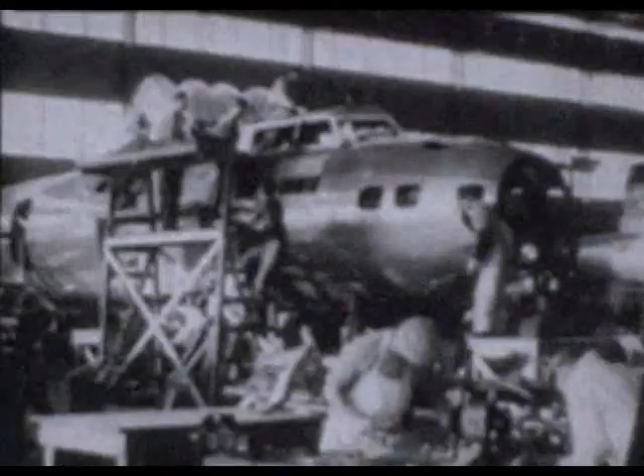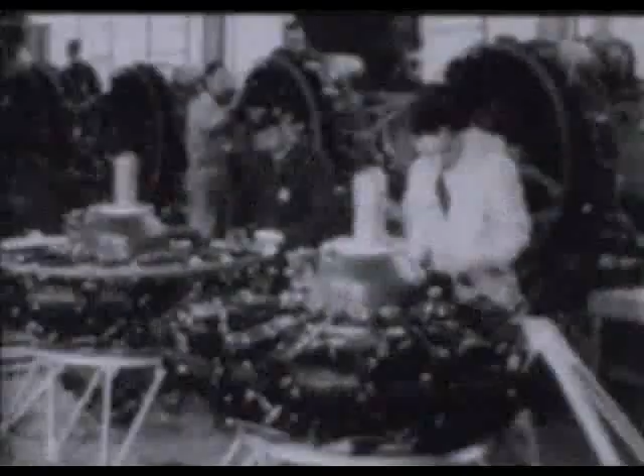Marching men and weapons to the battlefront. Backed up by an aroused American nation, our air power grows mightier by the hour. With speed, born of long experience and inventive genius, raw materials dug from the earth become swift flying wings overnight. Millions of precision parts made of steel, aluminum, and other vital metals become giant engines ready to fly.

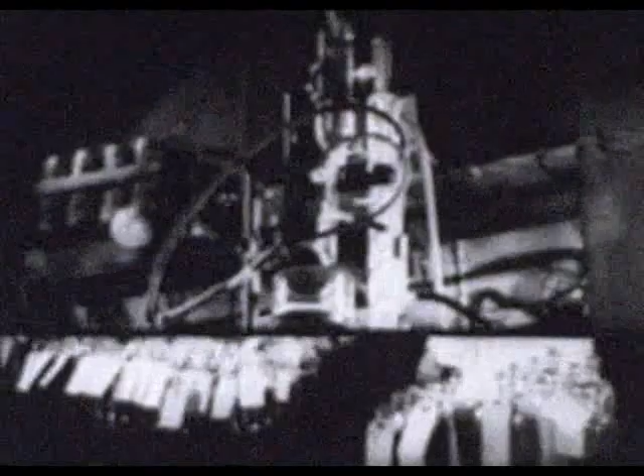Black crude oil raised from deep in the earth is transformed by the magic of chemistry into high-octane fuels to give these engines surging life, power, and speed. The petroleum industry is proud of its part in this mighty battle of the skyways, for from its long years of research have come the improvements in aviation gasoline which fly our planes.

From new refining units, skyscrapers of steel rising swiftly all over the land, comes a vast and ever-increasing flow of high-octane aviation gasoline. Great tanker fleets move endlessly across the seven seas to give the United Nations air supremacy in every corner of the globe. Yes, oil is ammunition, for without it, these mighty wings cannot fly.

But oil does not fly by itself. It takes men to use this ammunition, men who know how to use it. And while our boys make the best pilots in the world, learning to use it is no easy job. It means hard work, drill, and study. Such power cannot be handled overnight. It must be mastered step by step, as all you men well know.

Remember the very first time you climbed into the cockpit of a training plane? That was your introduction to this new kind of power. Yes, of course, there were only a few horses in the nose of that first plane, but it seemed like a million, and you got a bang out of feeling that power respond when you revved her up. But bigger still was that great moment, that day when your instructor climbed out of that plane and said, "Okay, kid, take her away. She's all yours."

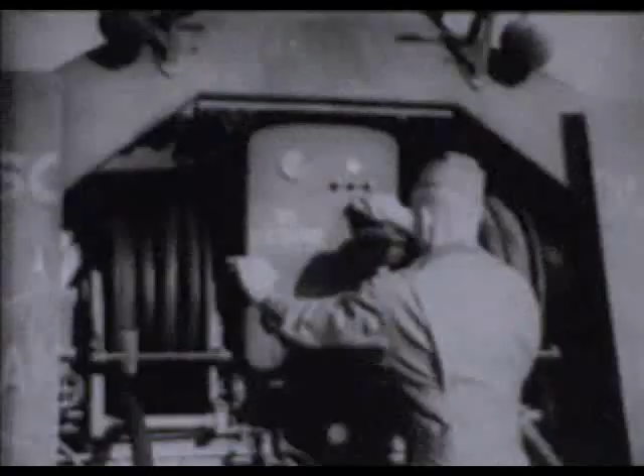Yes, you probably felt you were handling a lot of power even in that first trainer, and you wondered what it was going to be like to fly something really hot later on. That wasn't all you wanted to know about power either. For instance, why did they fuel your primary trainer with gasoline from a truck marked 73 octane, while over there a truck marked 91 octane was filling the tanks of a more powerful, advanced trainer?

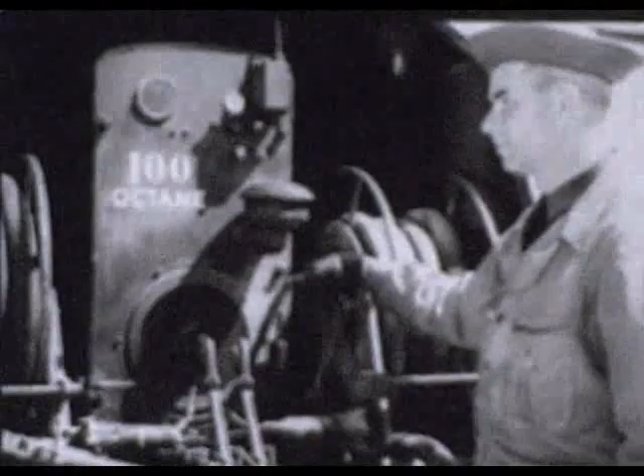Why couldn't they use the same fuel in combat? Why do they have to be so careful to fill a fighter's tanks with 100-octane gasoline? What would happen if those fellows made a mistake and put this 100-octane gas into the tanks of a small trainer that called for 73? Or what would happen if you tried to use 73 octane in the engines of a Flying Fortress?

That strange word, octane. What does it mean? Something to do with power, obviously, but exactly what? These questions are important. Knowing the answers may someday save your life or your plane. Maybe you've never realized it, but the gasoline we handle so casually every day is one of the most powerful substances known to man, far more powerful than the most destructive explosives.

For comparison, we all know that dynamite has terrific energy. Far more powerful than dynamite is TNT, the king of war explosives, used in all our shells and bombs. Yet gasoline, the gasoline that carries those bombs to their target, has, pound for pound, three times the energy of TNT, ten times the energy of dynamite.

And if this tremendous power in gasoline is not kept under control, it can be just as destructive as dynamite. Even a little of that energy, running wild, can ruin an engine as efficiently as an enemy shell, and almost as quickly. To understand why, we must know what happens to gasoline inside an engine. Let's begin with a simple demonstration of gasoline combustion.

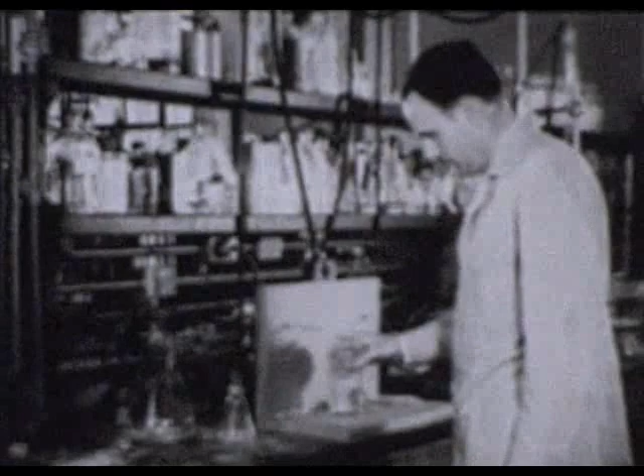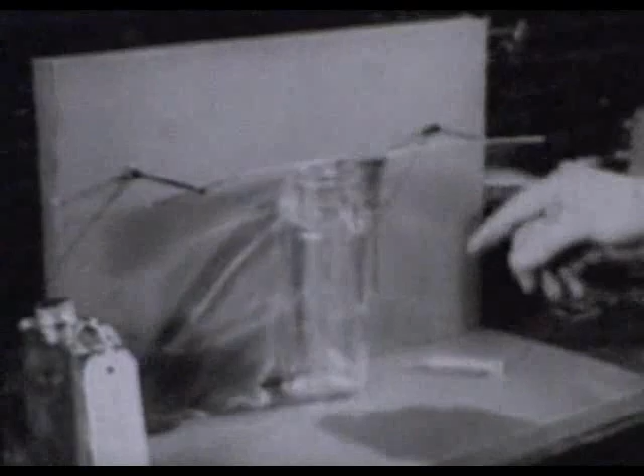Here we have an ordinary glass bottle. To close the bottle, we have a cork which fits tightly into the neck. Through this cork extend two wires connected to a spark coil so that a spark may be fired between the ends.

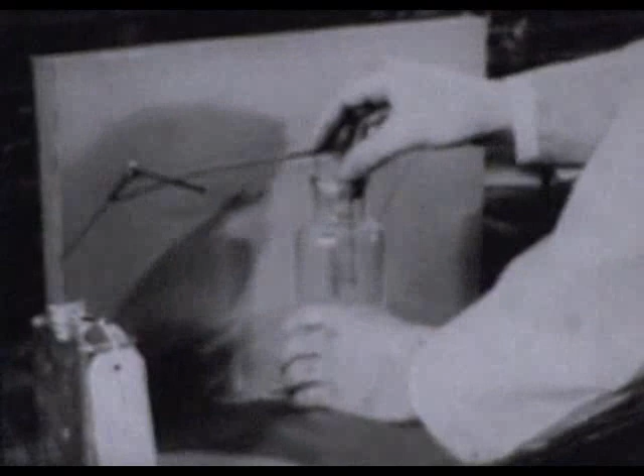To make our demonstration, we'll take a few drops of ordinary gasoline and squirt them into the bottle. Then with the cork, we'll close the bottle tightly. The gasoline, vaporizing and mixing with the air in the bottle, forms a highly combustible mixture. Watch closely what happens when a spark ignites this mixture of gasoline and air.

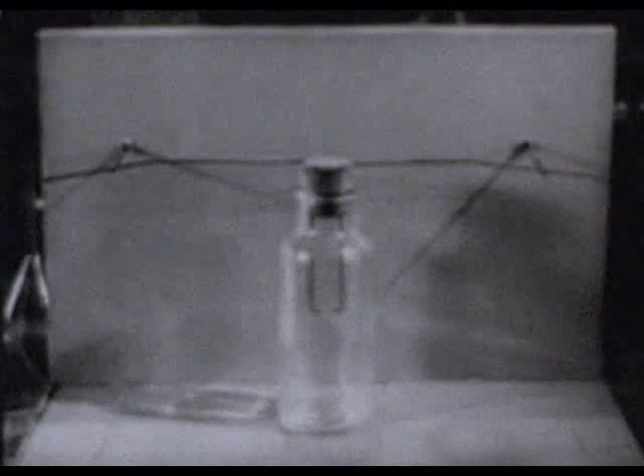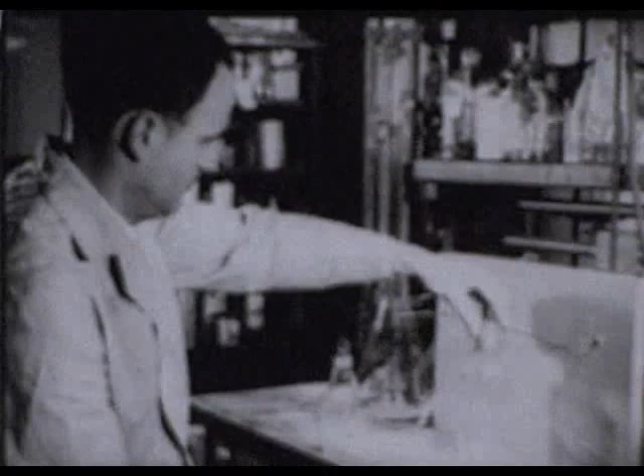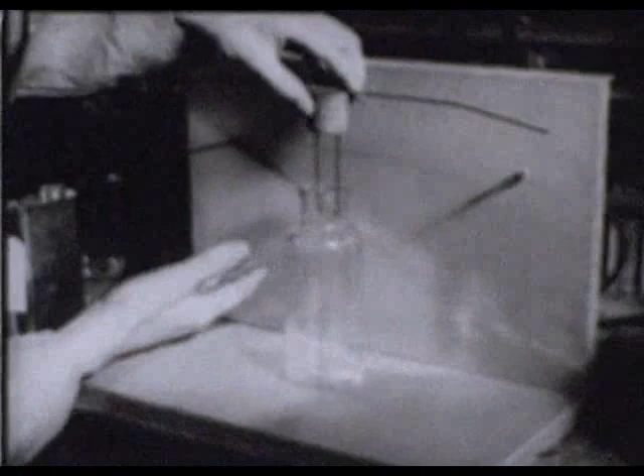This illustrates very simply the basic principle of gasoline combustion. The burning mixture converted the gasoline's energy into heat. That heat, expanding the gases in the bottle, created pressure. And the pressure blew the cork out of the bottle, changing the heat energy into mechanical energy.

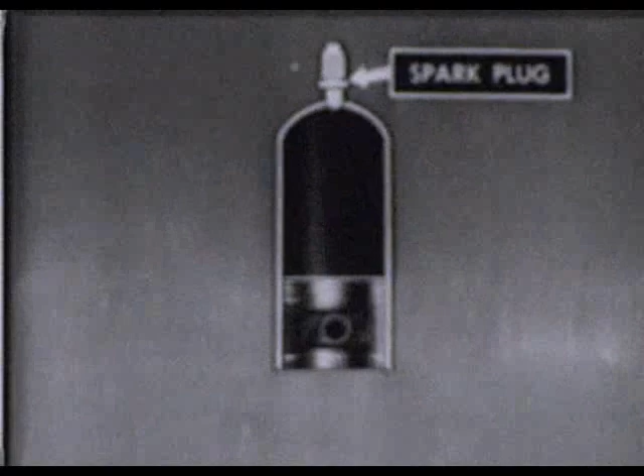Now if we take this same glass bottle, turn it upside down, make it of steel instead of glass, expand the mouth to make a straight-walled cylinder, enlarge the cork into a close-fitting piston, put in a spark plug instead of wires, add manifolds and valves to admit fresh mixture and release the burned gases, then attach our piston to a central crankshaft, we have made our bottle into one cylinder of a typical aviation engine.

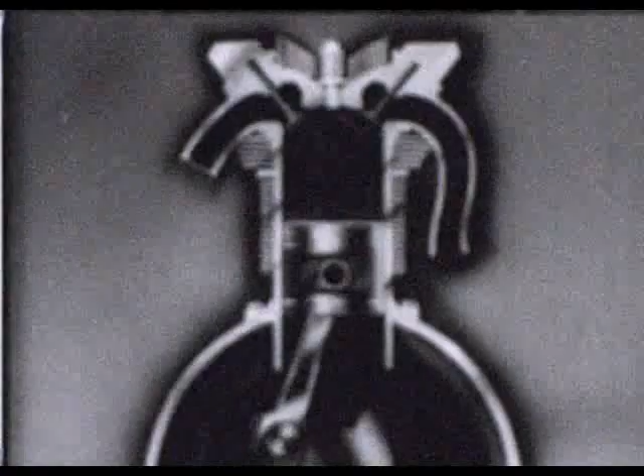This fundamental principle is the same whether it's applied to the smallest type of four-cylinder engine of a training plane or to the big engines that power a giant cargo carrier. But why is it that gasoline develops so much more power in one of these engines than it does in the other? Size alone is not the answer.

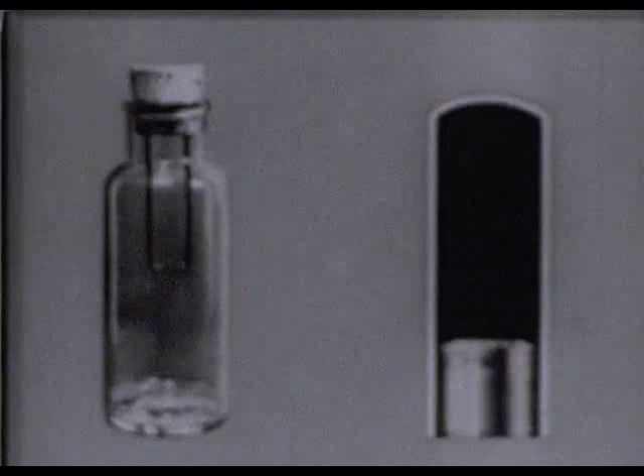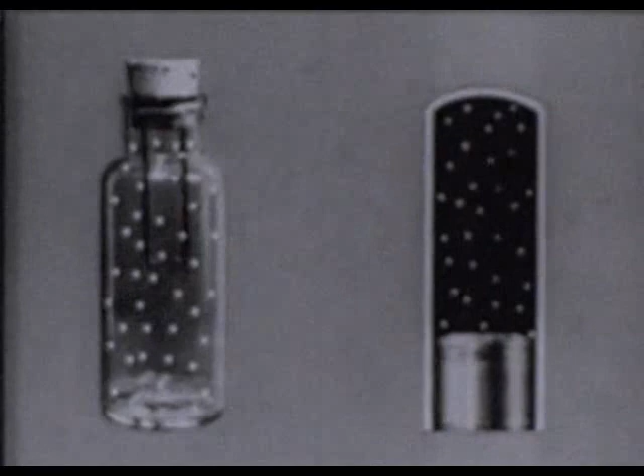Going back again to our bottle and cylinder, notice that there's a very important difference between the mixture we burned in our bottle and the mixture burned in the combustion chamber of an engine. The mixture in the bottle was under atmospheric pressure, the same pressure as the air outside. In burning, it develops very little power. But the mixture drawn into the cylinder is tightly squeezed by the piston to a small part of its original volume. This compression will produce far greater power from exactly the same amount of mixture.

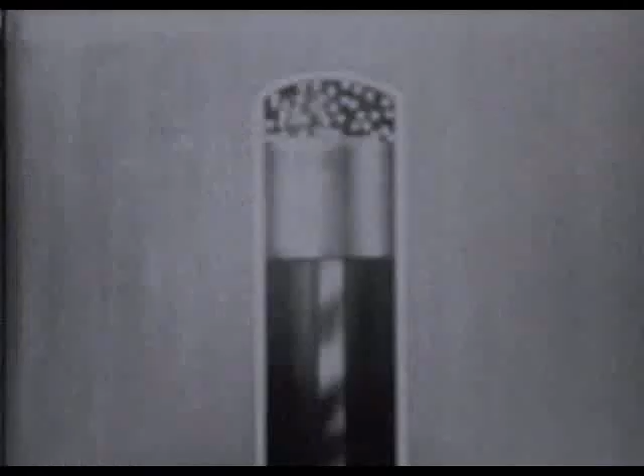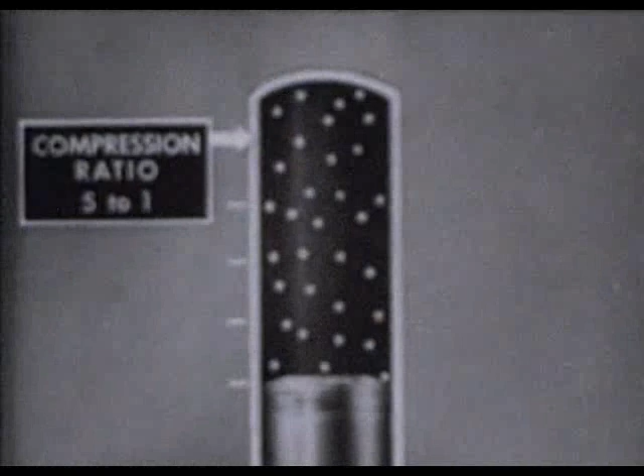The measure of how much the mixture is compressed is called the compression ratio. For instance, if the piston squeezes the mixture to a fifth of its original volume, we say the cylinder has a compression ratio of 5 to 1. If it is squeezed still further, say to an eighth of its original volume, we say it has a compression ratio of 8 to 1.

And in an engine of any given size, the more the mixture can be compressed by increasing the compression ratio and also by boost or supercharging, the more power each cylinder will develop. Higher compression has made possible the great increase in power of our modern engines without a proportionate increase in their size and weight. In theory, we could get still more power by carrying the compression higher and higher.

But we reach a definite limit when we continue to raise compression in trying to get this added power. This limit is in the gasoline itself and is known as detonation, or more commonly, knocking.

To understand what detonation is, let's take a look inside one cylinder of an engine and watch the gasoline mixture burn, slowed down several thousand times so that we can follow clearly exactly what happens. During normal combustion, the piston is just approaching the top dead center when the spark plugs fire. The instant that the sparks ignite the mixture, it starts to burn smoothly and evenly.

Beginning at the points of ignition, the flame burns through the combustion chamber, advancing like a ripple when a pebble is dropped into a mill pond. This results in a steady push against the piston that delivers all the power of the expanding gas to the crankshaft. What you see here illustrates normal controlled combustion, the correct grade of fuel burning under normal operating conditions.

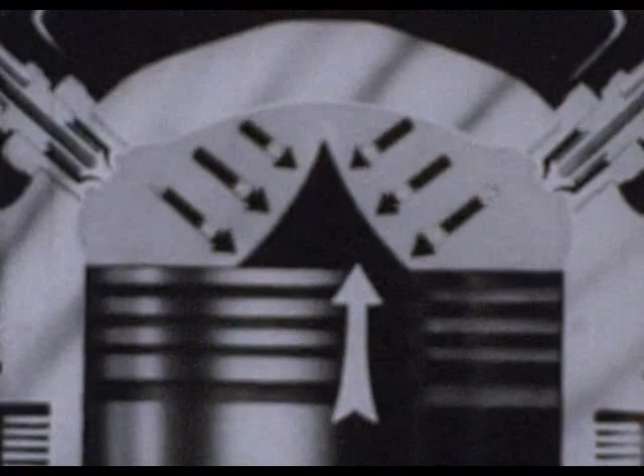Now, any inflammable gas has a certain temperature at which it will ignite of its own accord, and this unburned portion of the mixture quickly reaches its own self-ignition temperature. When that temperature is reached, this unburned mixture ignites of its own accord, and being under extreme compression, it suddenly explodes or detonates with an almost instantaneous white-hot flame of tremendous violence, like this.

The shattering force of this detonation is what produces the characteristic metallic ping called knocking, and it is caused by using a fuel too low in octane or anti-knock quality to withstand the high compression built up in the combustion chamber. In an automobile engine, this knocking isn't so serious. Often you can hear it.

But in an aviation engine, it can rarely be heard above the propeller and exhaust noise and is vastly more dangerous and destructive. These detonations, or super explosions, occurring hundreds of times a minute, release the energy in the gasoline so suddenly that much of it cannot be transmitted to the crankshaft as useful power.

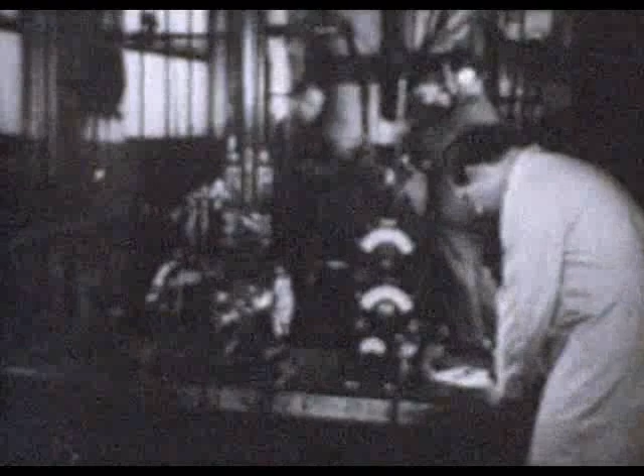Thus, instead of getting full power from our fuel, we are now getting intense heat, wasted heat energy. The engine and cooling system cannot carry away all this excessive heat. The result is extreme overheating in the cylinder. In the engine test laboratory, we can show how quickly this extremely dangerous temperature rise takes place.

Here we have a small one-cylinder engine running on a high-octane fuel. We're going to make this engine knock by simply switching to a lower-octane fuel, but first we'll mark the instruments at their points of normal operation. Head temperature, you can see, is now running about 450 degrees Fahrenheit, which is normal for this particular engine. Revolutions per minute are running a little over 1,300, which is also normal.

At this speed, the engine's power output, which we'll also mark, is about 9/10 of 1 horsepower. The engine is operating on the proper grade of high-octane fuel, hence combustion is normal. There's no knock in the cylinder. But now we'll make our switch to a lower octane fuel and see what happens. Listen to the engine. Now watch the temperature.

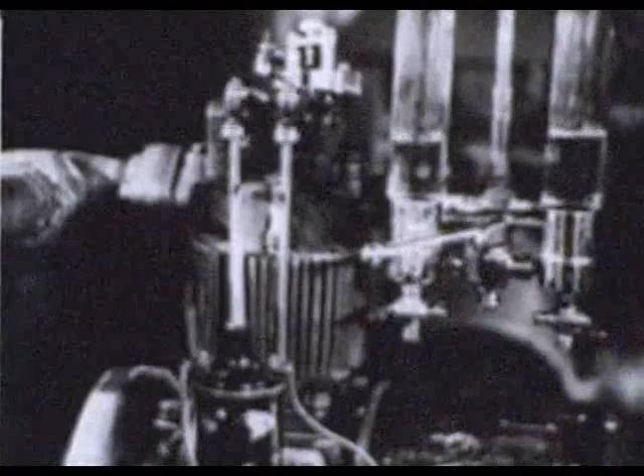On low-octane fuel, the engine started to knock almost immediately, and within a few moments, under detonating conditions, the cylinder head temperature climbs from 450 to around 750 degrees. Note that this harmful rise in temperature is accompanied by a drop in speed of more than 400 revolutions per minute, a third of normal speed. And at the same time, note that our power has fallen off to less than 1/4 normal output.

This shows clearly that with detonation, more fuel energy goes into waste heat, and less of it is converted into useful power. And that's just what happens in your plane engine if detonation takes place. In an aviation engine, such a knocking condition, if allowed to continue for only a short time, can crack or burn a piston or even blow a cylinder head, instantly putting the engine out of commission and possibly creating a life and death emergency for the pilot. Or at least a badly needed plane grounded for an overhaul or a new engine.

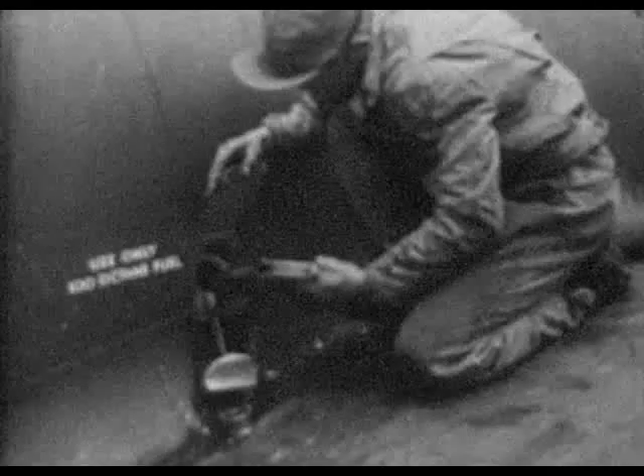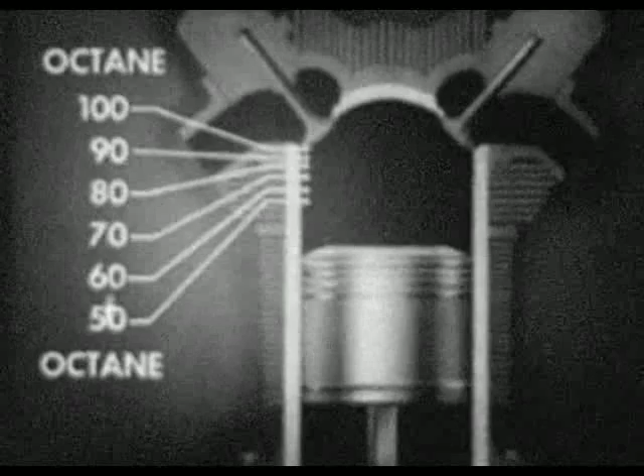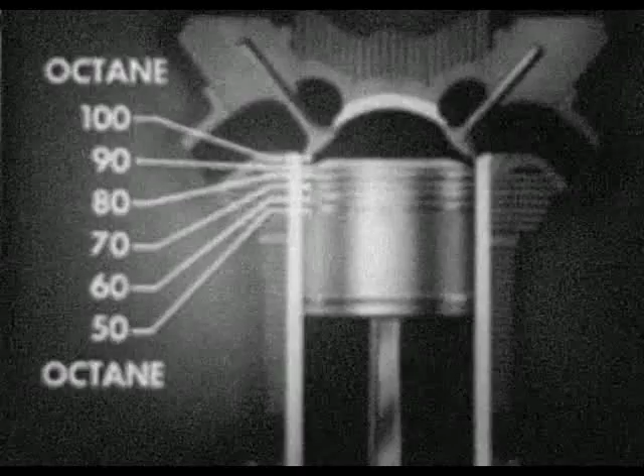Now that we know how important detonation is, let's answer some questions about octane number. First of all, what does it mean? Octane number is simply a measure of a fuel's resistance to detonation under compression. The more compression the fuel can take without knocking, the higher octane rating it gets. For example, 60 octane resists knocking under higher compression than 50 octane. 70 octane is better than 60, and so on. The higher the octane fuel we can provide, the more compression engineers can build into their engines. Thus, the greater the power those engines can deliver without detonation under normal operation.

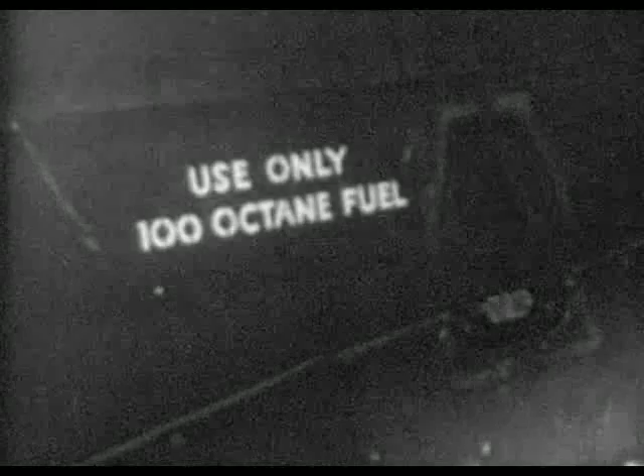Every aviation engine is built to operate on a certain specified octane number fuel, and fuel of that specified minimum octane number must be used to prevent detonation. If the fuel used has too low an octane number for the compression of the engine, detonation will result. For instance, if 73 octane were used to fuel a Flying Fortress, that big bomber probably could never get off the ground. If it did succeed in taking off, its engines would be badly damaged.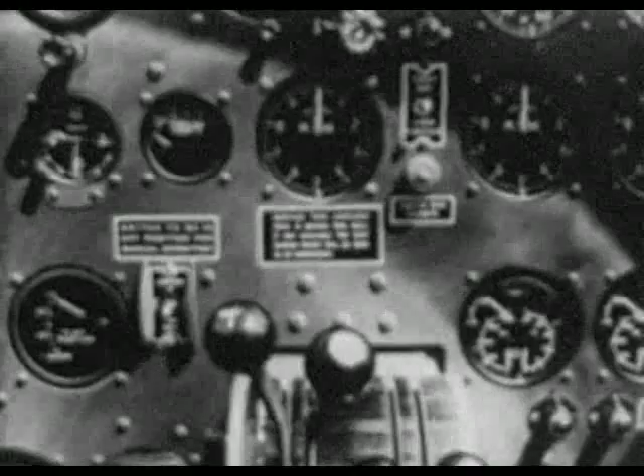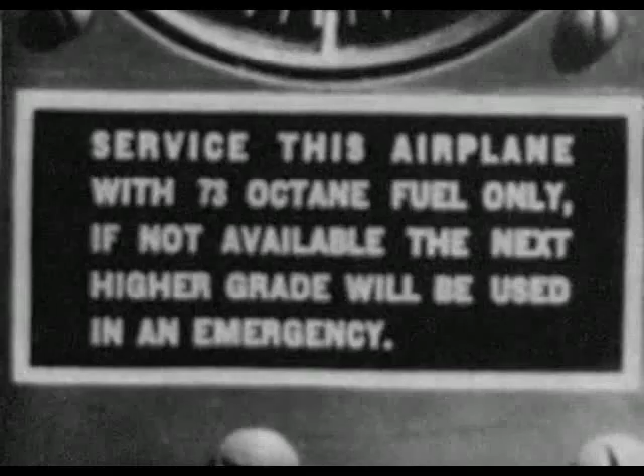But you can also remember this. There is no danger whatever in using a higher octane than the engine calls for. As long as the fuel is better than the specified minimum, it is perfectly safe to use when the correct specification fuel is temporarily unavailable. But just being sure you have the specified fuel in your tank is really only the beginning. There are also operating factors controlled by the pilot which can cause detonation in any engine, even though it is run on the correct octane number. These factors are temperature, pressure, and mixture ratio.

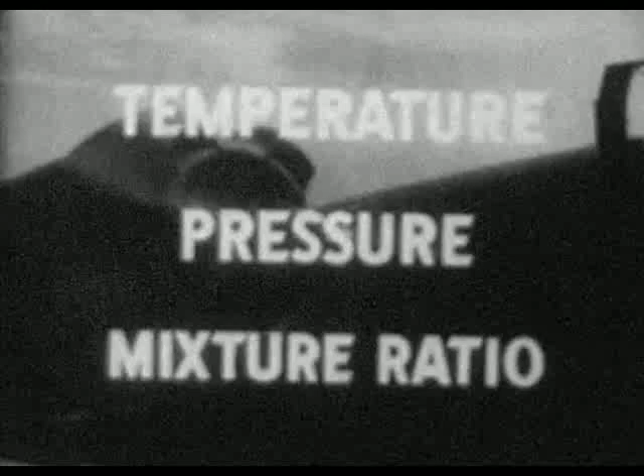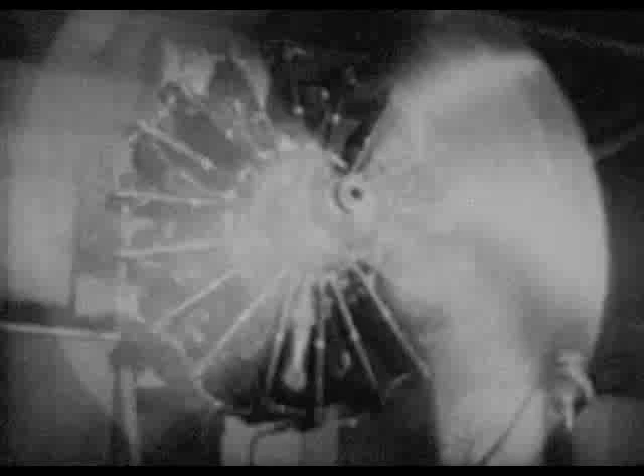The importance of these three factors can be shown clearly by using a typical aviation engine anchored firmly to a test block in the laboratory. Here we can show detonation in a way which we could not do safely in actual flight. This engine has the same kind of controls and instruments usually found in the cockpit of a high-powered plane. And in addition, a special laboratory instrument, a knock meter, which will instantly detect detonation when and if it occurs. Right now, our engine is running normally on the correct octane number fuel.

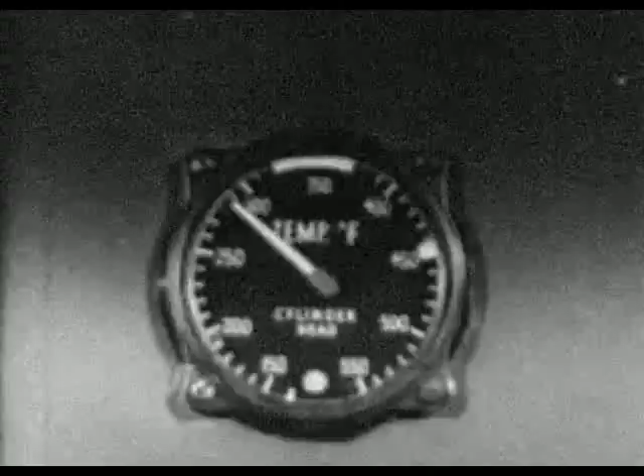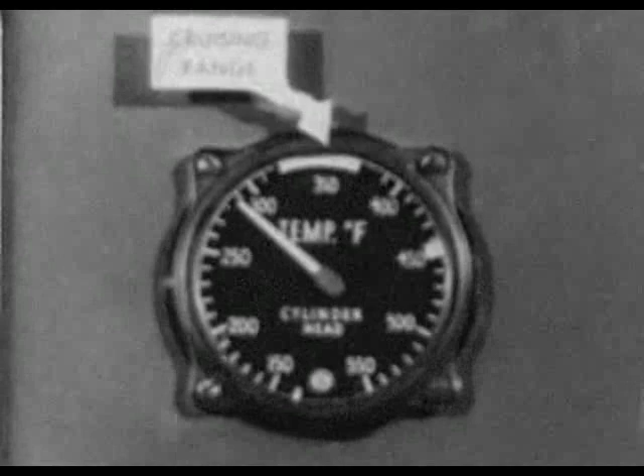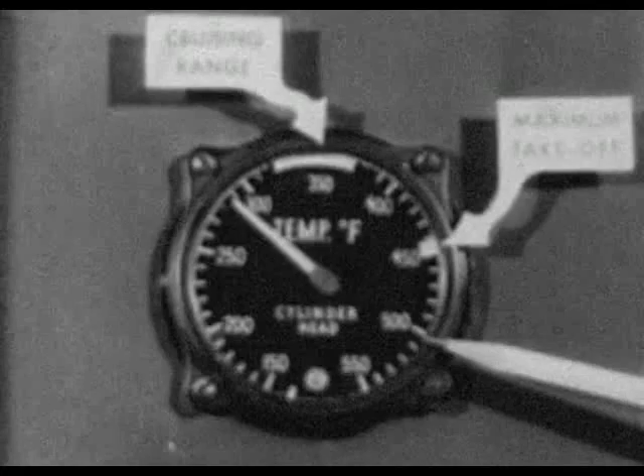Temperature is still low. This gauge is extremely important, for it tells us the temperature of the cylinder head, the spot where detonation occurs. A green line on the gauge indicates cruising range, the normal range of temperature for cruising, while a red line shows maximum takeoff temperature considered safe for this engine. Any temperature reading above this line means danger, for it can easily lead to destructive detonation. To prove this danger, we'll let our engine run until the cylinder heads are badly overheated.

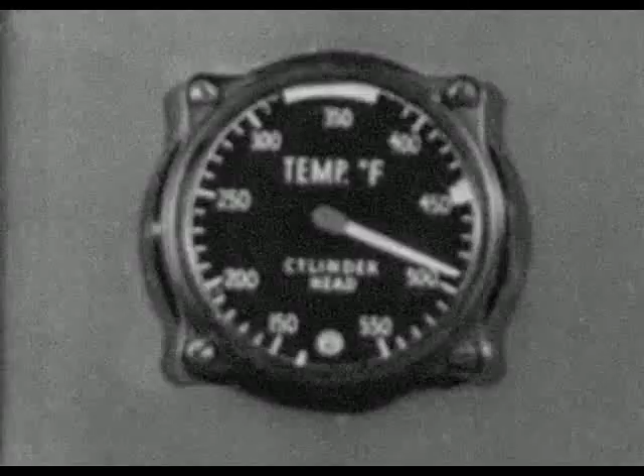Our temperature is now dangerously high, but with the engine idling, there is still no detonation taking place, as the knock meter shows. But what would happen if we tried to use the maximum allowable power of this overheated engine? On a takeoff, for instance. To find out, let's pretend we are on a takeoff and see what happens.

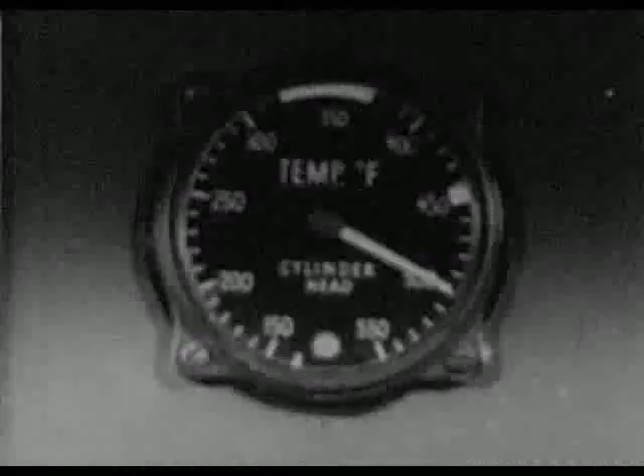So far, okay. There she goes. Within a few seconds, our knock meter begins to register. The instant the detonation starts, our temperature begins to climb still higher. In the short length of time which would be required for a takeoff, we've developed severe and dangerous detonation. A few more seconds of this, and our engine might easily be ruined. Better throttle back.

Here in the test laboratory, knocking is easy to detect, but in an actual plane it might develop and the pilot never know it until too late. Prevention is the only cure. Don't allow your engine to become overheated before you take off. Remember, there are several possible causes of overheating that the pilot must watch.

Such overheating may be caused by warming up for too long a period at too slow a propeller speed to give proper cooling, or by long idling with the ship pointed downwind, especially in hot weather when the ground temperature is high. Or it might easily be caused by making a long taxi downwind, particularly in summer or in a hot climate. So take warning.

If you see your cylinder head temperature is too high before taking off, check your operating conditions immediately. Cowling flaps should be open. Any other cooling adjustments on your particular plane should be set for maximum cooling. The carburetor heater should be set full cold, unless you know from the temperature and humidity of the outside air that there is danger of carburetor icing.

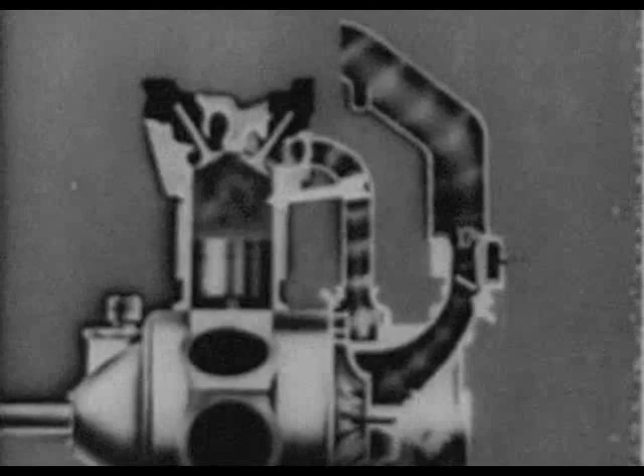The amount of mixture which enters the cylinder through the intake valve here is proportional to the pressure built up here in the intake manifold through which the mixture passes. Hence, the manifold pressure becomes a measure of the power that is being developed in the cylinder. It is extremely important for the pilot to know just what this manifold pressure is at any time.

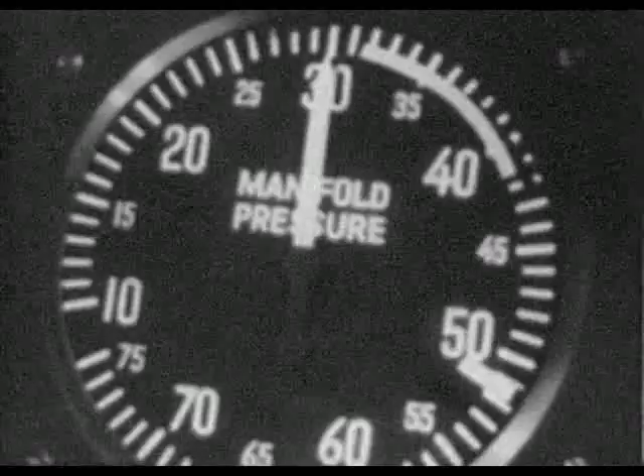To give the pilot this information, a pressure line leads from this point in the intake manifold to a manifold pressure gauge on the instrument panel. On our test engine panel, we have a similar manifold pressure gauge. Actually, the power developed involves some other factors, such as engine speed. But for our present demonstration of detonation, we can assume a constant speed prop, which will maintain uniform RPM.

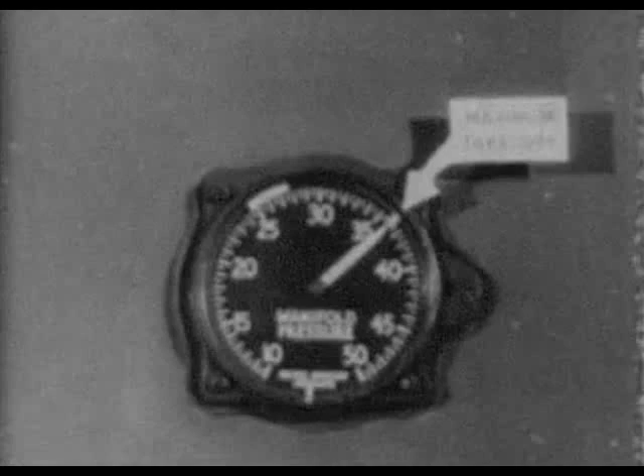A red mark on the gauge indicates the maximum takeoff pressure permissible for any particular engine, a pressure which can safely be used for only a very short period of time. The lower range of manifold pressure, indicated by a green line, is our cruising range, safe power output for continued use. Your manifold pressure should always be kept within this limit when cruising.

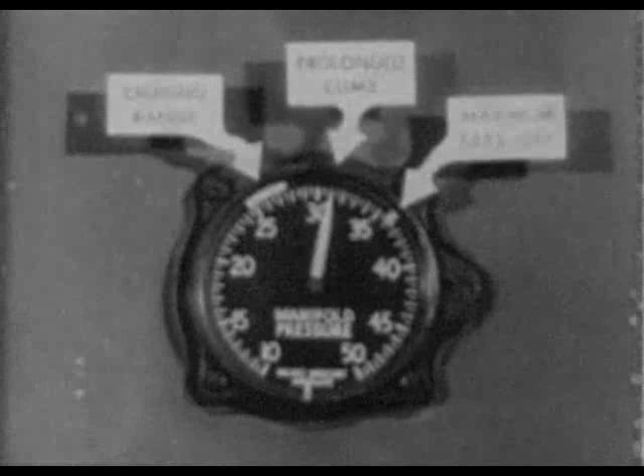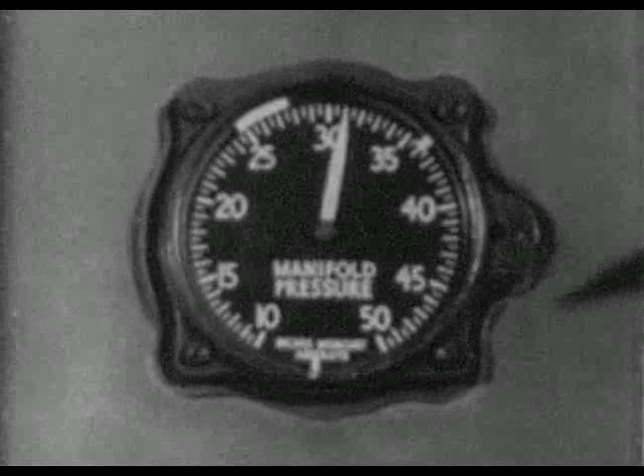Between these two lies an intermediate range used for prolonged climb or when extra power is needed in an emergency. On some gauges, this is shown by a yellow line. These manifold pressure readings should be treated by every pilot with the greatest respect. Driving an engine to excessive power output means you are building up too high a pressure in the combustion chamber, and such a condition will quickly cause detonation. Let's watch this and see for ourselves.

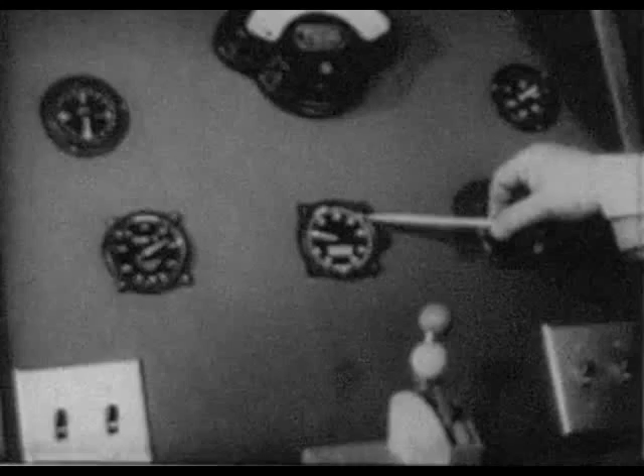With our engine cooled down again, let's try another takeoff, paying particular attention to manifold pressure. Our temperature is now safe for a takeoff, but we're going to draw more than the maximum allowable power output. All right, let her go.

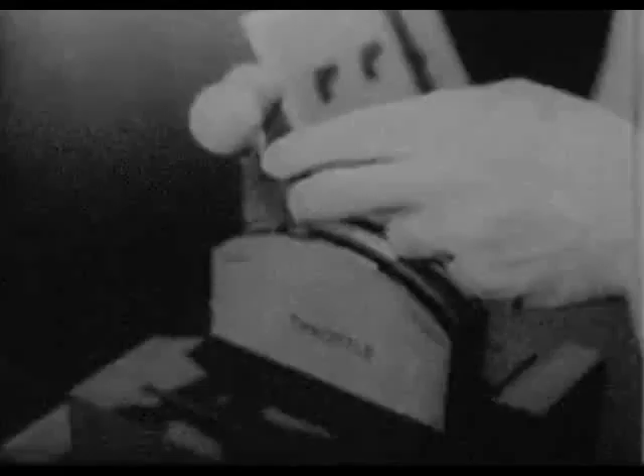Okay, operation so far is normal. No knocking. Manifold pressure is safe. But now, let's open up a little more. There she goes. Detonation almost immediately. Let's throttle back. This shows clearly that using more than maximum allowable power is another sure way to get into trouble.

Again, prevention is the cure. Never exceed the maximum allowable power output of your engine, unless extreme emergency demands it. Even then, the emergency must be carefully weighed against the possibility of engine failure. And now for the third important operating factor in controlling detonation, mixture ratio.

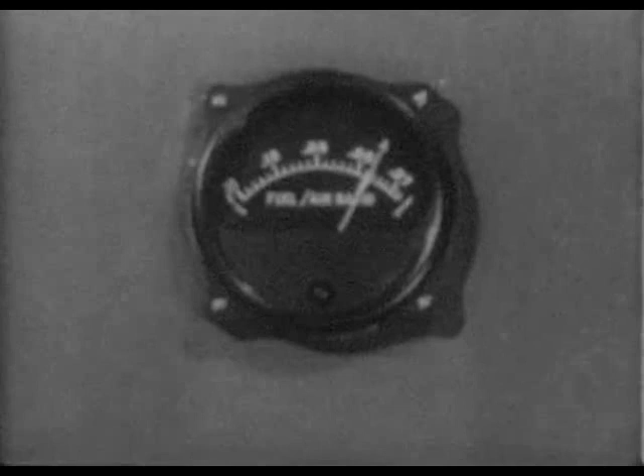On some planes, mixture ratio is controlled automatically. On others, the control is manual, as it is here on our test engine. A rich mixture is one containing a relatively large proportion of gasoline to air, while a mixture containing a proportionately small amount of gasoline is called lean. On our panel, we have an exhaust gas analyzer, which enables us to tell what ratio of gasoline to air is being burned in the engine. This information is particularly important on the test stand, where the safe operating conditions of various engines are established.

Under high power output, a rich mixture burns cooler than a lean mixture. Thus, rich mixture tends to prevent overheating and detonation when maximum allowable power is being drawn from the engine, and must always be used for takeoff or at any other time when maximum power is required. A lean mixture, on the other hand, is much more economical since it uses less fuel and is therefore used for normal cruising at higher altitudes to increase economy and cruising radius.

However, leaning the mixture too much will cause a drop in power and delayed combustion, which may tend to overheat and burn the exhaust valve. Thus, too lean a mixture, indicated by backfiring or excessive cylinder temperature, must also be avoided.

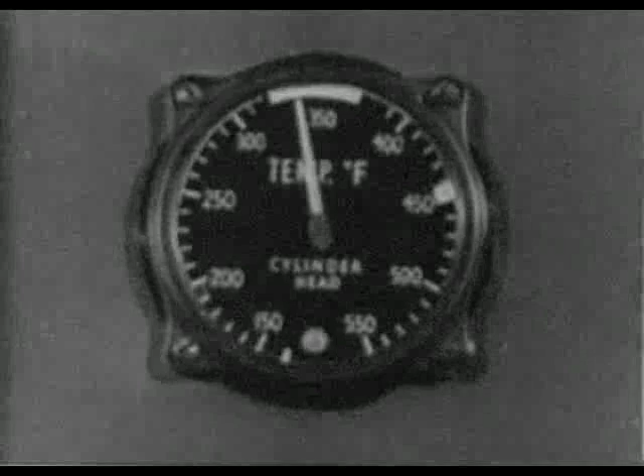The importance of proper mixture in preventing detonation can be shown easily here on our test engine. Again, let's simulate takeoff conditions. This time with our cylinder head temperature well down, but with our mixture lean instead of full or auto-rich, as we know it should be when maximum allowable power is to be used. All right, pour on the coal and let's see what happens.

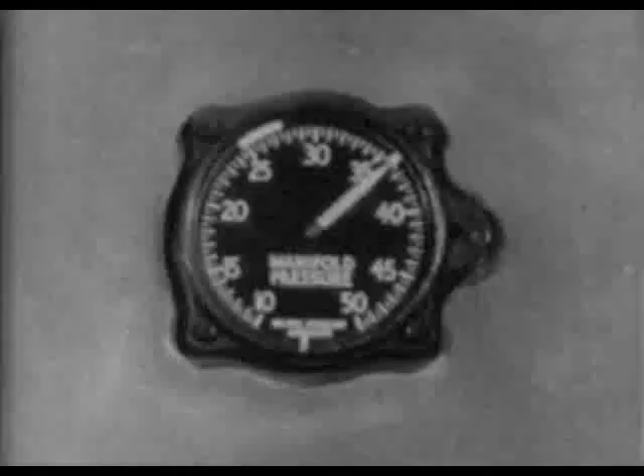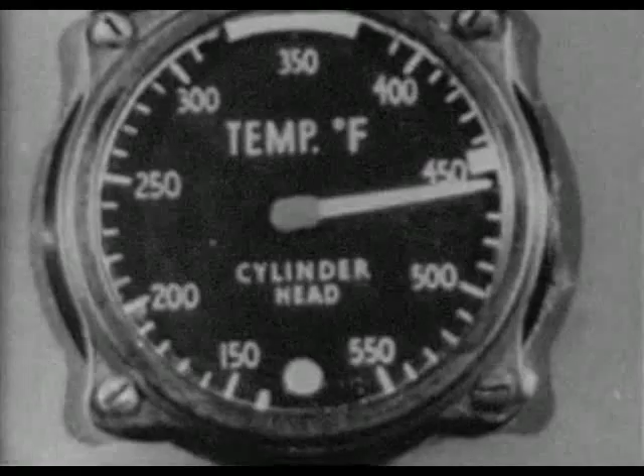Within the few seconds that it would take a plane to get up to speed for a takeoff, our engine begins to develop detonation, which continues to grow worse. This condition is definitely dangerous, as shown by the rapidly rising temperature. Before this condition gets out of hand, let's quickly apply the remedy, a full or auto-rich mixture. Within a few seconds, the character of combustion changes completely and detonation disappears.

Remember that in all of these demonstrations, this test engine has been running on fuel of the specified octane number. Yet even with this fuel, improper operation of the engine has produced detonation, proving that the pilot himself has a big responsibility in preventing knocking even when the specified grade of fuel is used. Once in the cockpit, the pilot must be constantly on the alert from the instant that the engine is started.

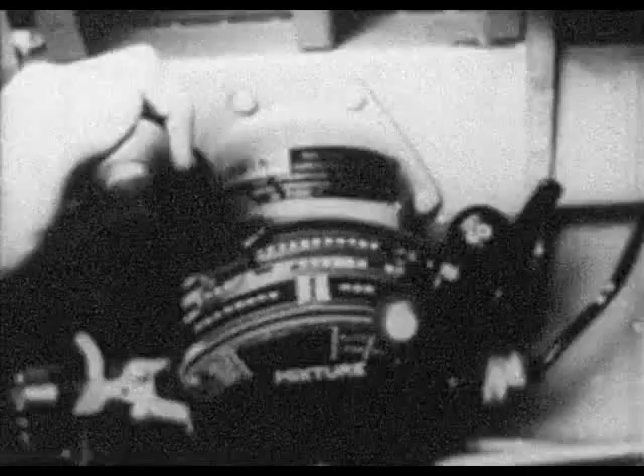Temperature must be kept under control. As you warm up your engine, swing it into the wind if you're in a position to do so. Don't take unnecessary chances. If you have to make a long taxi downwind, especially in hot weather, keep an eye on your head temperature gauge. In addition to your ignition checks, be sure your prop is correctly set, that cowling flaps and all other adjustments are set for maximum cooling. Carburetor heat set for full cold, unless you know there is danger of carburetor icing. Mixture rich for cool combustion.

Now, as you give her the gun, don't fail to make that vital 1, 2, 3 check. Temperature, normal. Manifold pressure, inside the line. Mixture ratio, rich. And you're off with no danger of a detonating engine. The rules are the same whether you're handling one engine, two engines, or four engines. And remember, use maximum power output for the shortest possible time.

As soon as your plane is airborne, with landing field obstacles cleared, throttle back for your climb to altitude, thus reducing your manifold pressure. This position may be kept for climbing as long as your temperature remains within normal operating range. When you have reached an altitude where you're going to cruise, you can throttle back again to normal cruising manifold pressure. If you're making a long cruise at fairly high altitude, your mixture can now be leaned out for greater fuel economy and cruising radius without danger of overheating or knocking.

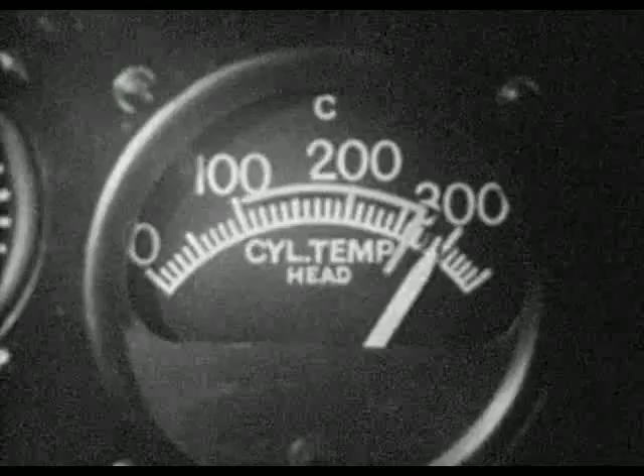In flight, constant check must be kept on all operating conditions. Abnormal operation, if not detected quickly, can develop trouble surprisingly fast. Cylinder head temperature should be watched closely. Power output should remain constant under uniform cruising conditions. Any abnormal, sudden, or unexplained rise in temperature at any time is a danger signal, a warning of conditions which may bring on detonation. The condition must be corrected immediately. Enrich your mixture. Reduce manifold pressure by throttling back until temperature comes under control.

During combat, of course, anything can happen. Any part of the engine or cooling system may be damaged. Maximum power may be demanded, regardless of conditions. But even in the heat of battle, a good pilot will instinctively try to balance the needs of the emergency against the condition of his engine. For without an engine, the fight is over. And remember that the greater number of engine failures do not occur in combat, for actual fighting time is short. They occur during the thousands of hours of everyday flying, training, ferrying, patrolling, reaching the enemy, and getting back again.

And remember, too, to fly and fight, the odds are yours. From production lines all over our country are coming the finest engines in the world for you to fly. From giant refineries flows an endless stream of the best fighting fuel in the world. High-octane gasoline our enemies cannot even hope to make in the quantity needed for this global war. Yes, you men have the power to win. It's up to you to make the most of it.